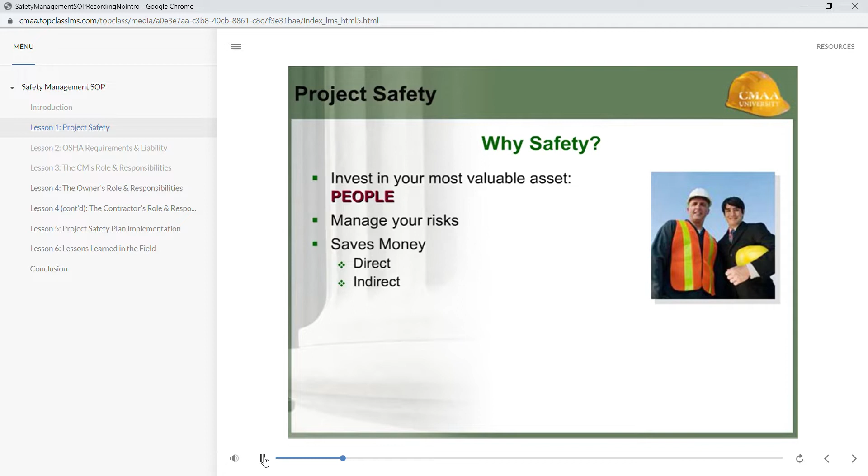It's about managing risks, your risks, the owner's risks. It saves money, both direct and indirect, for people who can't work, and indirectly for the cost of hospitalization and all those other things that come along with an injury.

The hard hat and the vest, good to go. There should be a standard practice for all construction managers on site. This way you're out there setting the example. If you're wearing your hard hat, your vest, your construction shoes, your safety glasses, this will encourage the workers to follow that example as well. And it's the right thing to do.

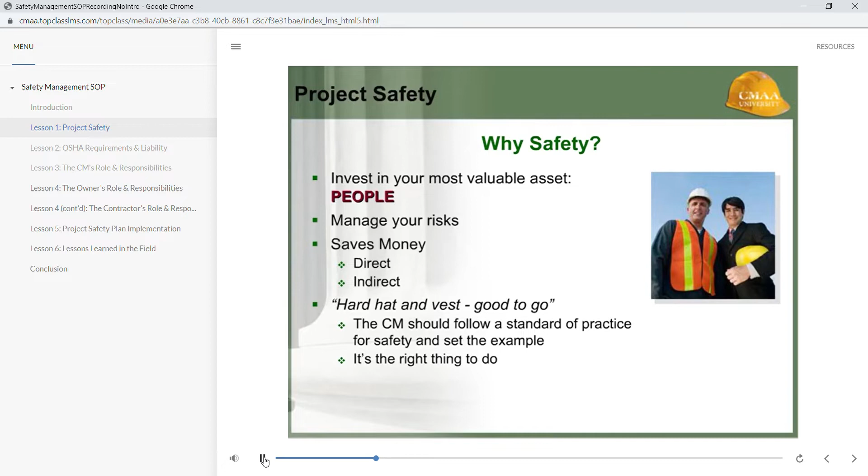Safety is an investment. It's the experience modification rate, a multiplier used by the insurance industry to determine the cost of workers' compensation. An EMR of 1.0 is average. An EMR less than 1.0 is good. An EMR greater than 1.0 means your bid will be higher.

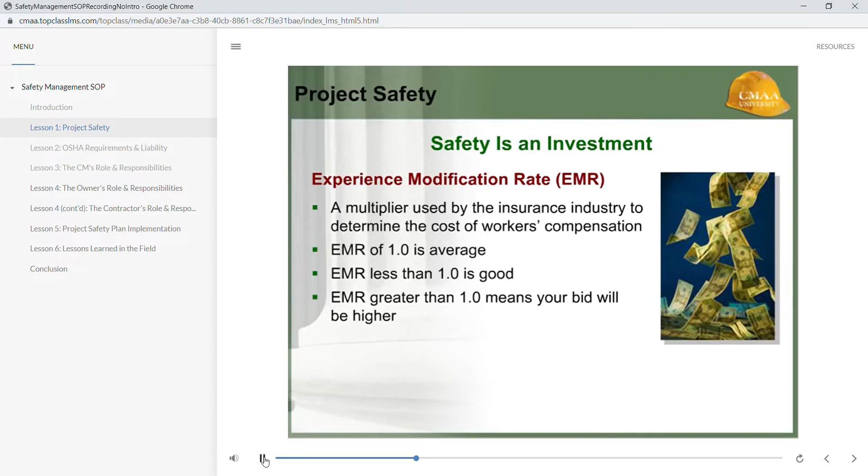When the owner is selecting a construction contractor, this is one of the things that they should be looking at in the construction contractor's past experience to see what their safety rate is and to determine whether that's the contractor they want to have building their job.

Bid price equals material plus subs plus self-performed. Self-performed equals material plus labor. All CMs should understand this, but owners may not. So it's a good thing for you to bring up as advice to your owner when they're selecting their contractor.

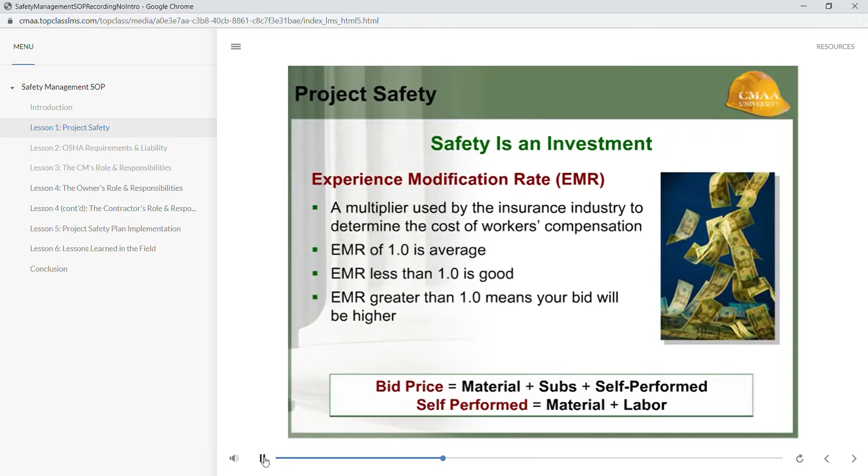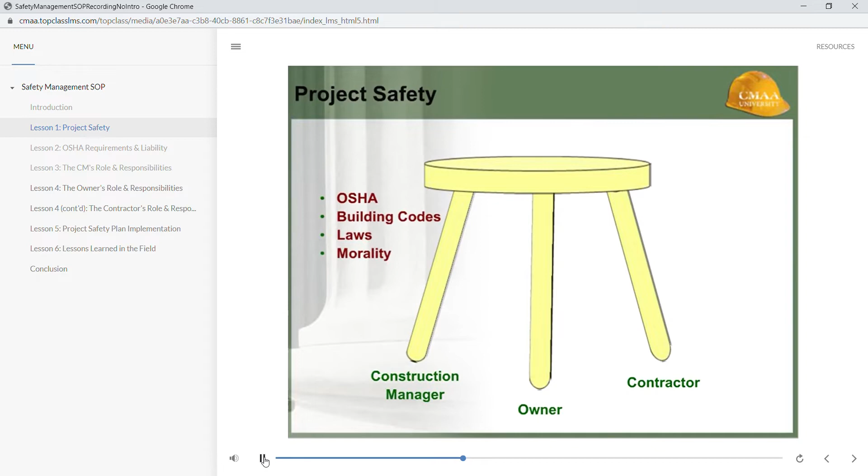So project safety, the first thing to look at is that you have a three-legged stool. The construction manager, the owner, and the contractor all have responsibility for project safety. A number of things contribute to that. OSHA requirements, the building codes, laws, morality, your ethical and professional behavior and actions on site, liability, your contracts and how they're written, insurance policies, and the actions that you take.

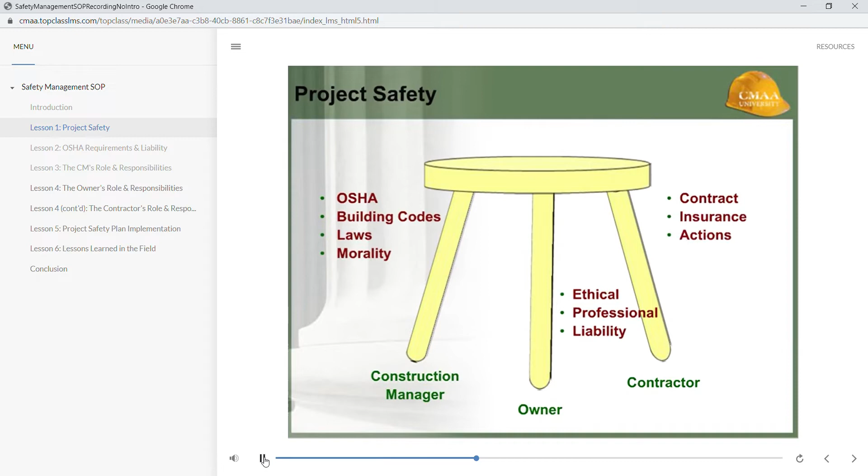A closer look at the players. Let's take a closer look at the players. The owner could be the government agency or private sector owner. You have to talk about what is their safety perception. What do they expect to see when they come on the site for a visit? And whose action do they expect to be taken when there seems to be a safety violation?

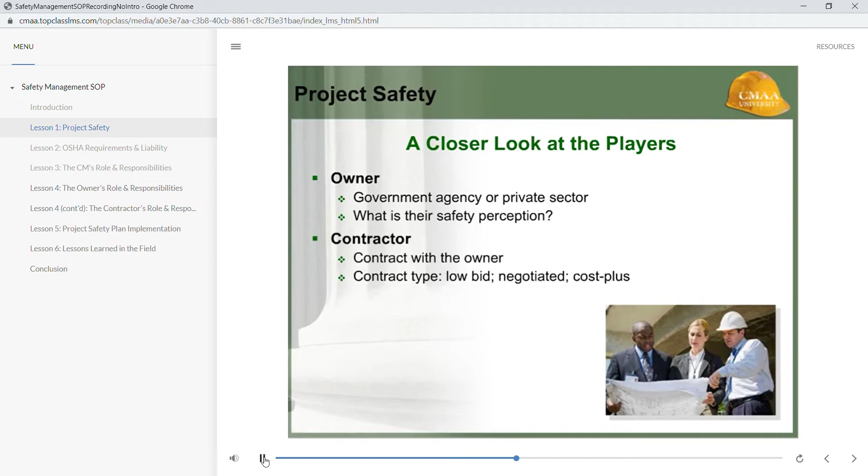The contractor has a contract with the owner and could be any number of contract types. Low bid, negotiated, cost plus. They might even be a design builder on a particular project. And then you have the third party, the construction manager, who also has a contract with the owner and acts as the owner's representative. Again, their eyes and ears on site.

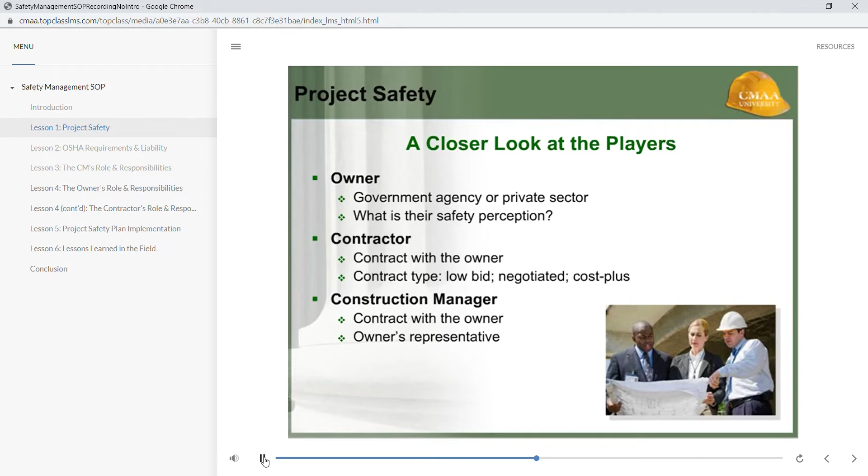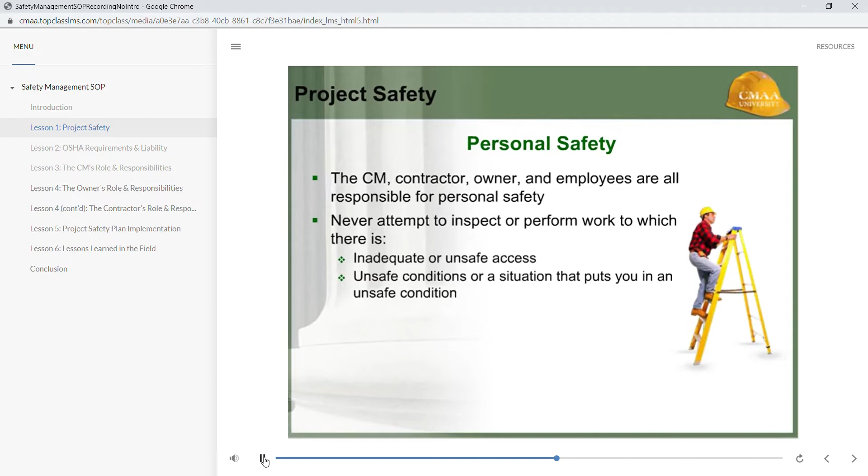The CM, the contractor, the owner, and the employees all have responsibilities when it comes to personal safety. Never attempt to inspect work to which there is inadequate or unsafe access, unsafe conditions, or a situation that puts you in an unsafe condition. Be able to identify the hazard using your training and experience.

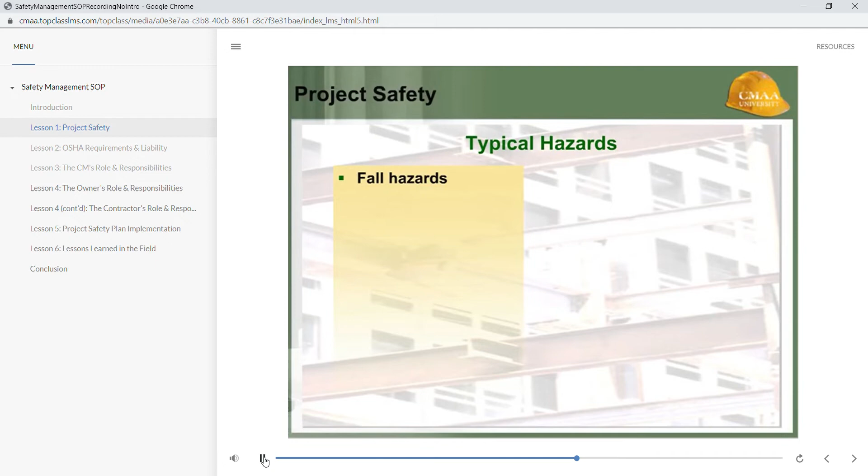Some typical hazards that you'll see on site. Fall hazards, which is any type of work that's above grade where someone can misstep, step off a scaffold, a set of stairs, anything like that. Vehicles. This could mean vehicles that are parked inappropriately, vehicles that come on and off the site that may be pulling things or are not the right size, etc.

Equipment. All kinds of construction equipment comes on site. You want to make sure that the pieces of equipment are well maintained, that they have a maintenance record, that you know that they're appropriate to be on site. Excavations. A great place for someone to have an accident, fall in a hole because it's not properly roped off or identified.

Maintenance of traffic. That means your access and egress. These two are actually related. How vehicles get on and off the site. What parking is allowed on site versus around the site, and how you control that.

Reliance on others. This is an interesting topic. In some cases, you need to rely on others. There are going to be times when contractors are going to need to tag out certain pieces of equipment to make sure that they're out of service while others are working on them. If you're working in a confined space, which is the next bullet, you want to make sure that you've got a partner there, to make sure that you are safe while you're in that confined space and able to exit comfortably when the work is done.

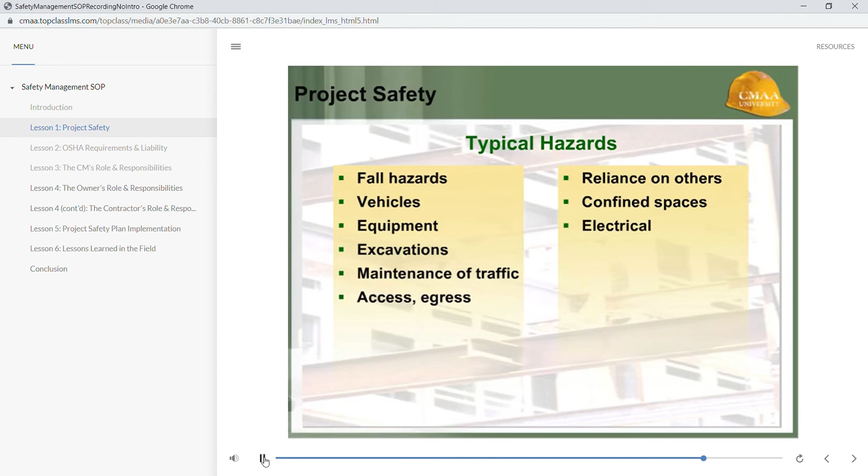Again, this is really about the contractor. As the CM, you're going to be monitoring these things, but you want to be aware of what they should look like so that you can point out when there may be a hazard. Electrical. There's all types of electrical hazards. It could be the breakers. It could be the distance between one piece of equipment and another. It could be just an extension cord that you see on the floor that looks frayed or not in good shape and needs to be removed from the project.

Cutting and welding. Whenever workers are using heat, torches, anything like that, it's an easy place for an accident to happen. Very easy to set something on fire when you're working on something next to it, whether you're welding a pipe or cutting a pipe. PPE requirements. This goes back to your hard hat, your vest, your proper footwear. Long pants. Can't be stressed enough that everyone on site should wear long pants to avoid getting things dropped on them, rubbing up against something, getting cut or gashed because they're not properly protected.

Regardless of the weather. Contaminants. Contaminants can be any number of things. Could be just dust in the air, but particularly hazardous materials, lead, silica, asbestos, things that you don't want to be breathing in while you're on site. And these, of course, have a whole other set of requirements when you're working with them in the hazardous material arena.